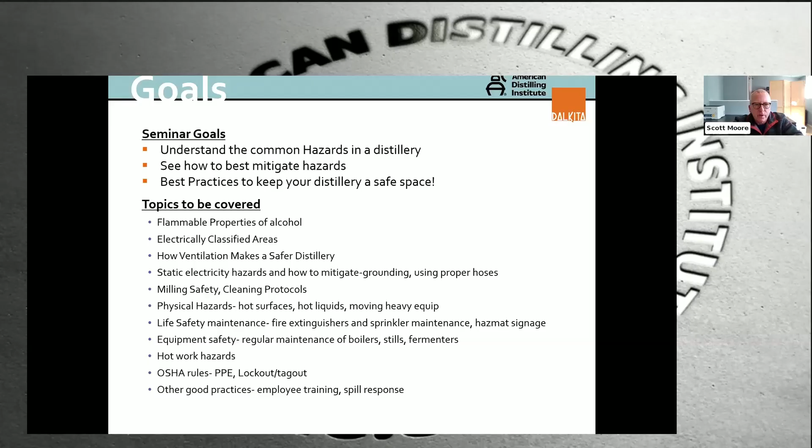To be more specific than what I just said, here are some topics that will be covered. You can read through these, and we'll go over everything as we get going.

So the first law of physics we want to look at is what exactly are the physical attributes of alcohol. Alcohol is a little bit different than other flammable liquids in that it's what's referred to as water miscible. So common sense tells us that 20% ABV is a lot less flammable, a lot less hazardous than 96% GNS.

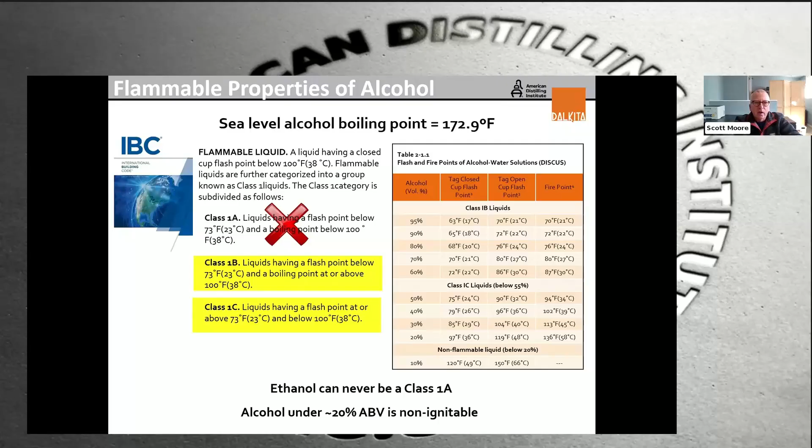And the codes don't really recognize that too well. The codes identify pretty much anything over 20% as needing to be treated the same as a flammable liquid. So we've got these three classes of flammable liquid defined in the code, and your alcohol is going to be a 1B or a 1C. It's never going to be 1A, because alcohol at sea level boils around 173 degrees, and a 1A liquid, which would be more like gasoline, boils below 100 degrees.

So let's also talk about my favorite extracurricular class here. What is really burning? The liquid doesn't burn, what burns is the vapor. If you look at this picture of the flame, it's riding about an eighth of an inch above the surface of the liquid.

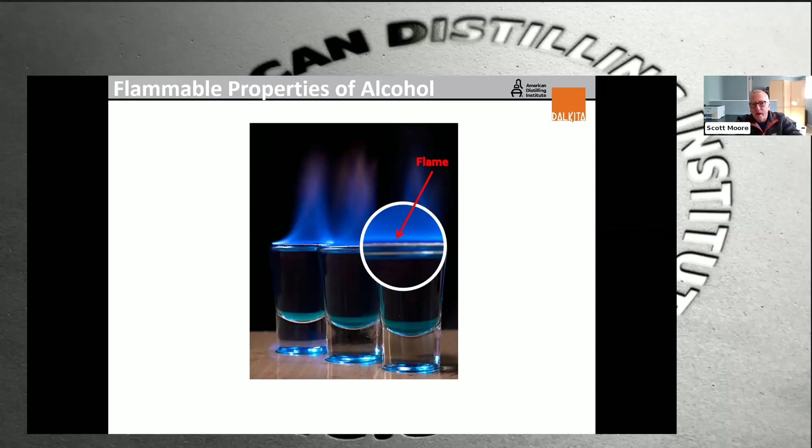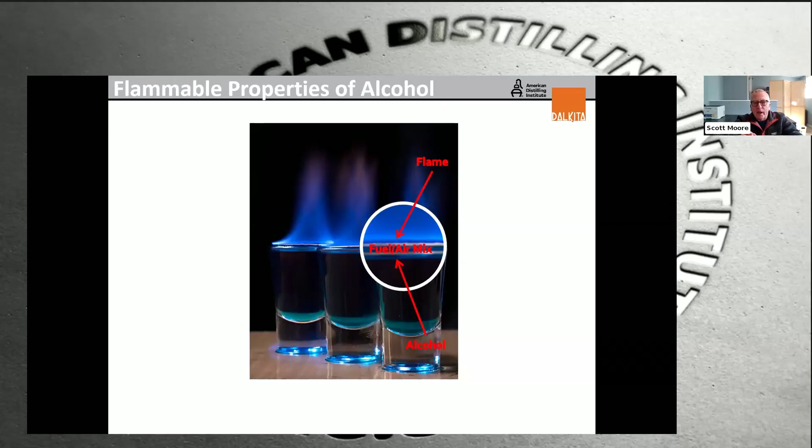What's happening is that once the flame gets started, it heats the alcohol, and the alcohol rises to the top. In that gap, we have too high of a concentration, that eighth inch gap of fuel and air, to burn. And then above that, where the flame is, is where we're within the flammable range.

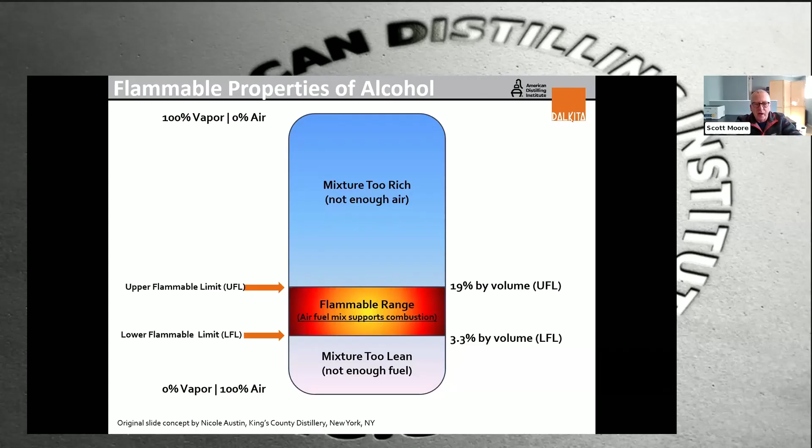So the flammable range is between 3.3% and 19% for alcohol. We don't really worry about getting over 19% because you'll know that pretty well if you're in that high of a concentration. But the codes want us to stay under 25% of that lower flammable limit.

So what could happen if you fill a space with a concentration within that flammable range is called a deflagration. A deflagration is the rapid burning of a fuel and air mixture. That's what takes place inside the cylinder of an automobile, a gasoline or diesel powered automobile. We don't have that in electric cars, obviously.

But there's a couple kinds. A deflagration can lead to explosive conditions, and the difference between a deflagration and a detonation, the technical term, is that a deflagration is subsonic, whereas a detonation occurs faster than the speed of sound. Deflagration is the burning of the fuel air mixture, whereas a detonation is a chemical reaction.

So we're not going to have a detonation. We will have a deflagration with potentially explosive concentrations.

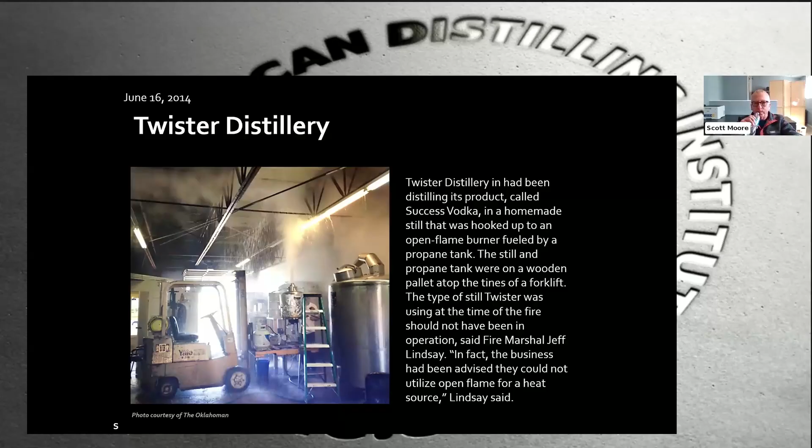And this was an employee that did suffer some burns. I think it's important to understand that while the distiller may have the common sense, perhaps someone working in the distillery doesn't. And so this is where standard operating procedures and boring safety talks come into play to prevent this sort of thing.

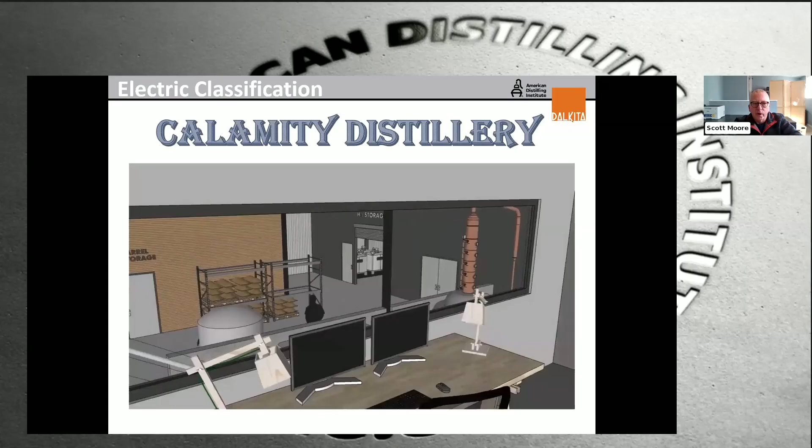So we've got your tasting room with a view to the prettier parts of the distillery. Up above on a mezzanine, we've got the small micro distillery's office where they can observe what's going on in both the production area and the distillery. They've got direct access out to the production area.

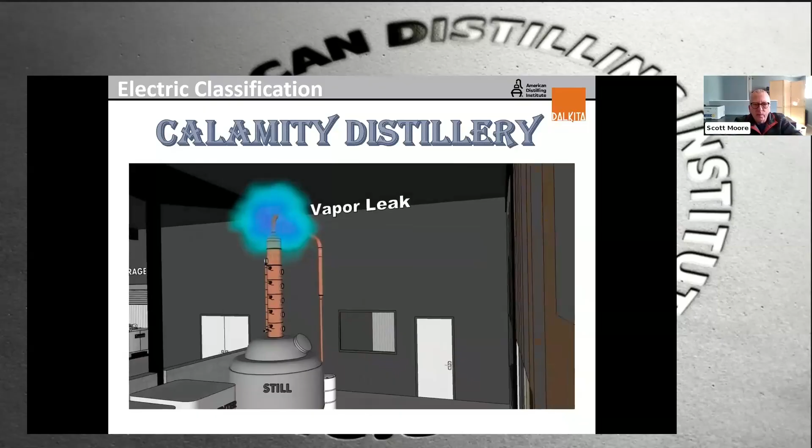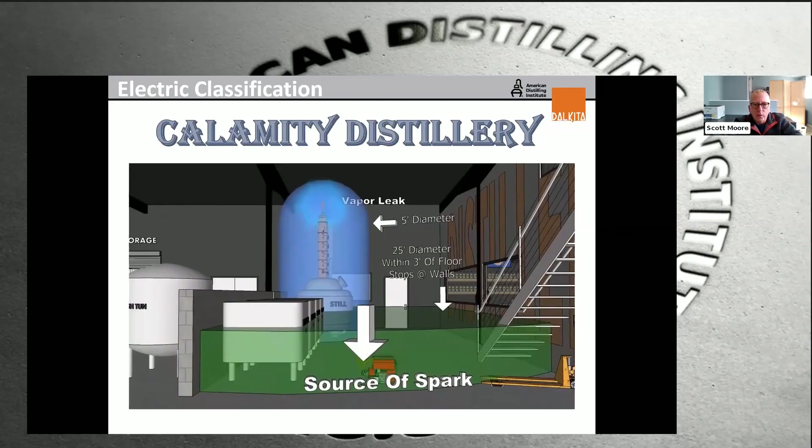And here we see some vapor leaking from the still. This is, by the way, labeled Calamity Distillery. Everything is going wrong here. But there, 25 feet away from the still, is the source of a spark. Can't quite tell what that is—looked like a generator or something.

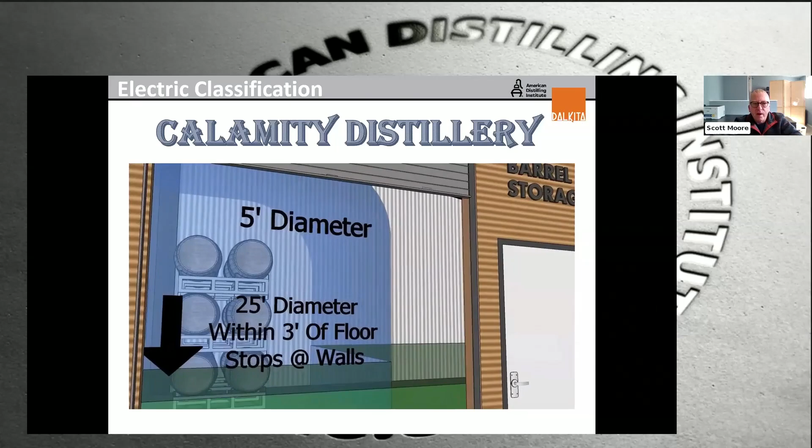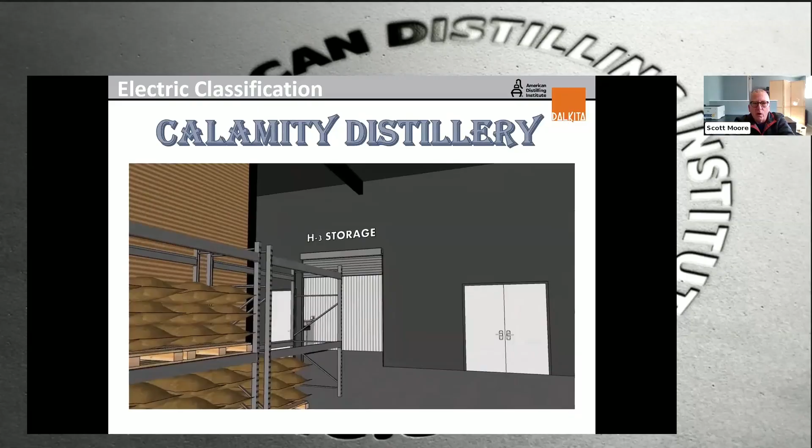Barrels do present a vapor issue, but it's very minimal. When we have done studies based on the angel share recorded data that is necessary for the TTB, it indicates that a very, very low level of ventilation is sufficient to deal with normal barrel evaporation.

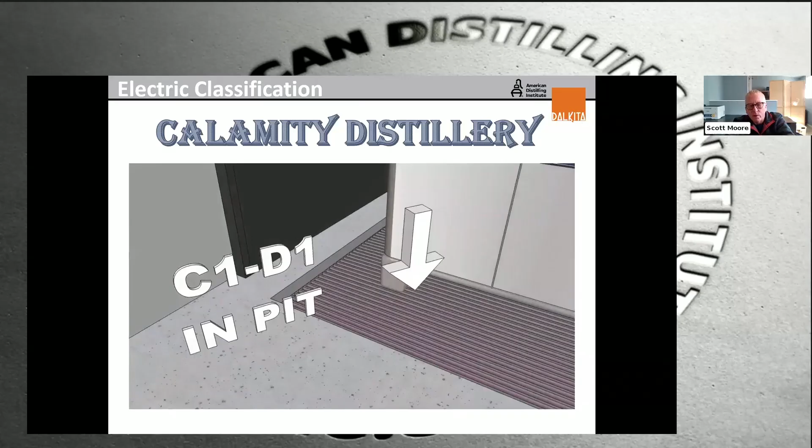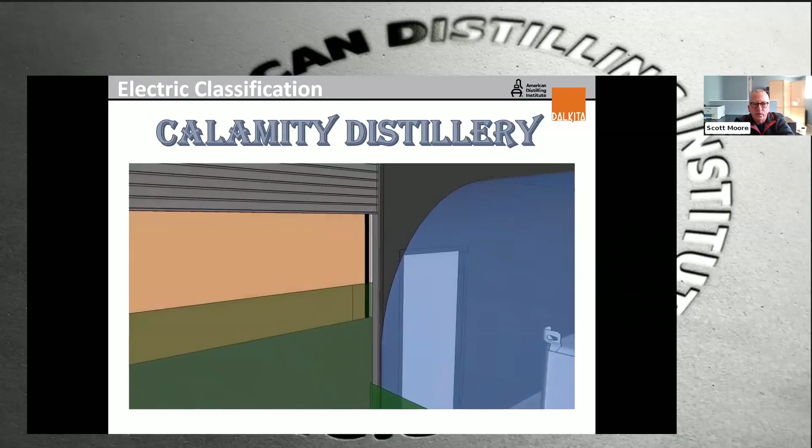When we get into a situation where we're storing totes above the maximum allowable quantities, we put them in a special room. There's a pit there, and the risk of vapor accumulation is generally due to evaporation from a spill. It's higher than the risk from barrels normally off-gassing, but lower than the risk presented by the still.

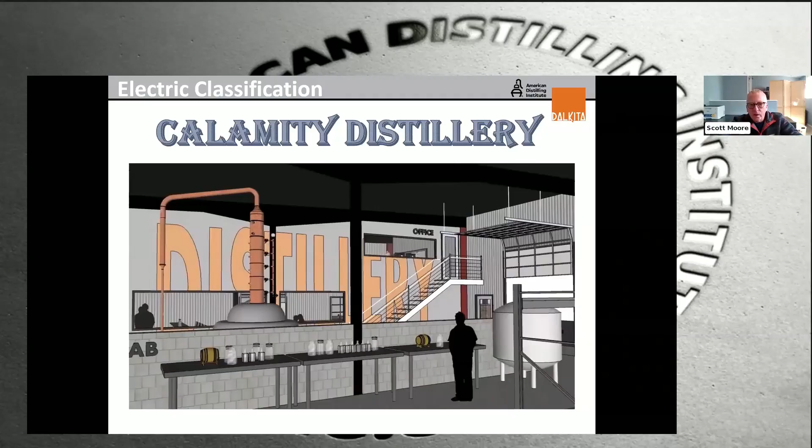The still is your biggest opportunity to have a vapor release, and really the level of ventilation needed to overcome a release from a malfunction in the still is going to be highly dependent on your operation.

So if you are reprocessing GNS by putting 50% GNS and water into the still and distilling it over a 1 hour period to create your own vodka in compliance with state and federal laws for being a distiller, that's going to produce a lot more alcohol per minute and require higher level ventilation than if you're putting 10% wash in a still and distilling it over 8 hours to produce a whiskey per se.

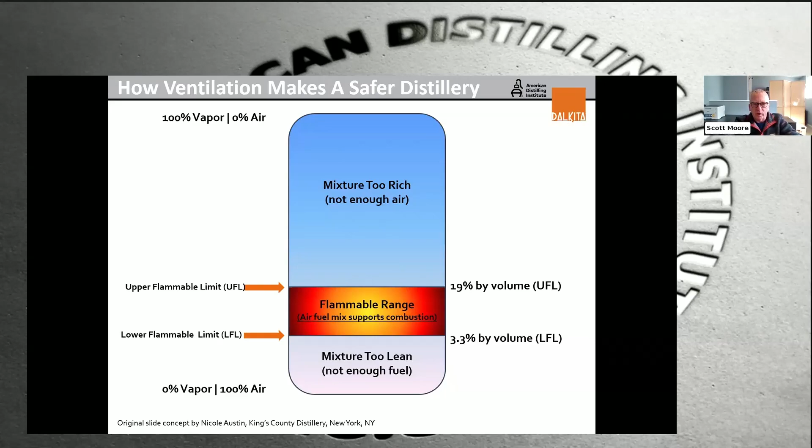So when we do provide the ventilation, the concept is that we want to sweep the alcohol vapors across the room. And so we provide, and the code dictates that the exhaust intake be within 12 inches of the floor. That's because alcohol vapor is heavier than air.

Sometimes, depending on the size of the area, where there's a dimension of 3 feet, we'll put an intake low that is a lower percentage of the intake makeup air than the intake that's high. The idea behind that is to sweep across.

Now, on a physics level, this works for alcohol, but it is counterintuitive to most building designers, engineers and contractors who might be wanting to use ventilation to circulate air to deal with heat buildup, where we all know heat rises. So you would put the exhaust high and the supply low.

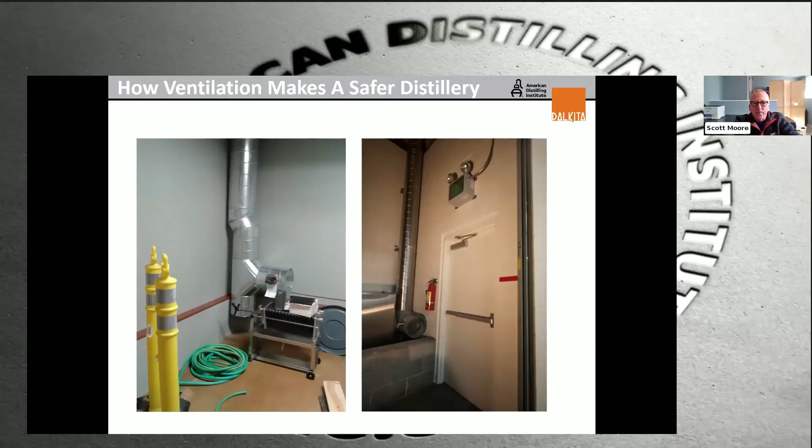That legally triggers a building code application, even if there's been no real physical changes to the building. So sometimes we see people get their first fire department inspection and a big surprise, because they thought they had complied by meeting the zoning requirements, and then they hadn't. So that's where that comes from - it's your state and local codes, and what you want to do is contact your municipality to find out exactly which codes have been adopted and how your local jurisdiction has modified them.

Did that answer your question, John? It did, and I would add to that - without disparaging local municipalities, if you're a new distillery in an area, and maybe you're the first or only distillery in that area, you can... I want to try and say this in a polite way. I think most people can expect a little static from your local authority, because through no fault of their own, they will have had no experience applying whatever their local demands are to a business. Any fire marshal in Kentucky is probably going to know it like the back of their hand. But if you're the first distillery in a small area and they're not familiar with all of that, there's two sides of that coin.

You may know the regs better than the person inspecting you sometimes, and you may have to put up a little bit of a fight or negotiate with them to get it right, depending on their interpretation of it and how they apply whatever the code is to an industry with which they may not be as intimately familiar as if you were putting in a machine shop or just a standard civilian office of some type.

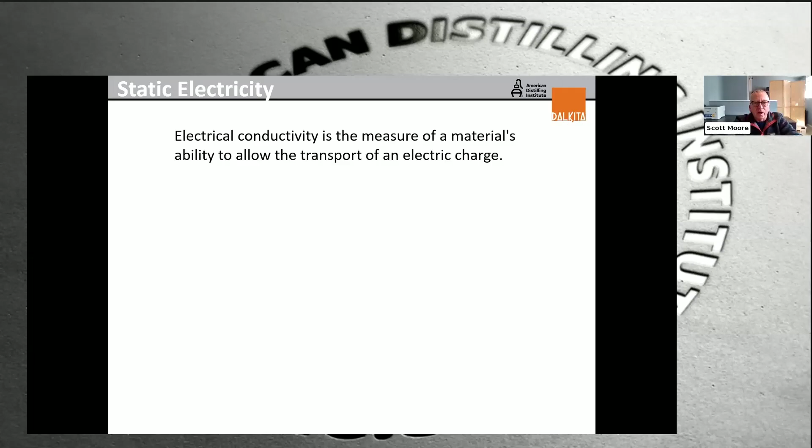All right, now electrical conductivity, let's see. This is about static electricity. So in the fire triangle, what we're talking about here is your heat source. And when we're talking about ventilation, we're talking about your fuel source. So the ventilation removes the alcohol vapor faster than it can build up. Heat source or not, there's not going to be an opportunity to complete that fire triangle.

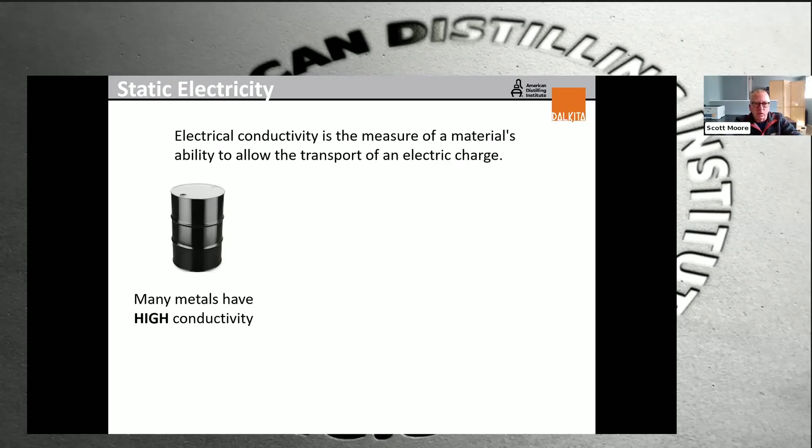The code requires also that we mitigate the heat source in several different ways, and one way is to eliminate static electricity. As a liquid or a grain solid moves through a pipe, it can develop static electricity. And if that pipe is not metal, it's not going to be able to conduct that static electricity.

So you can actually get a static charge coming off of a garden hose, for instance. Well, the right kind of hose has a wire in it that can then be, with the tri-clamp fitting, connected to metal apparatus. The idea is that we want to bond all those things together and then ground it. Alcohol falling through the air can also build up static electricity. Now, at the scale that we see here, where it's pouring a shot glass, you're not going to have a problem.

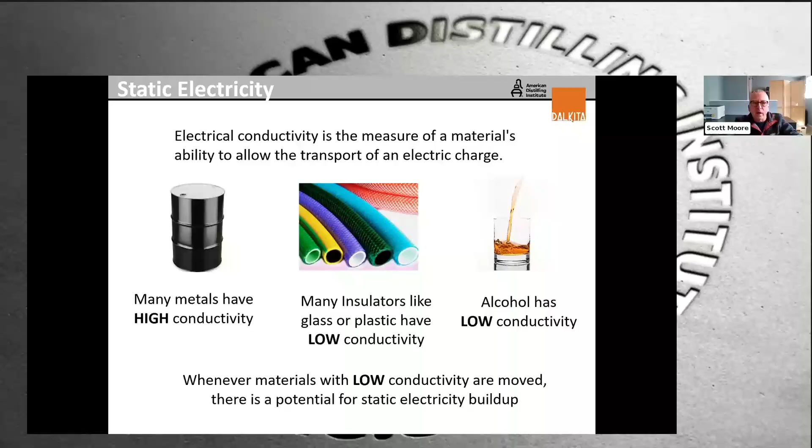But if you're filling a 10,000 gallon tank with GNS and you're dumping it in from the top, you really could create a static buildup in that liquid stream. So that's why we fill from the bottom. Here's an image of a pipe with liquid going through it to make the point that the pipe could develop a static charge.

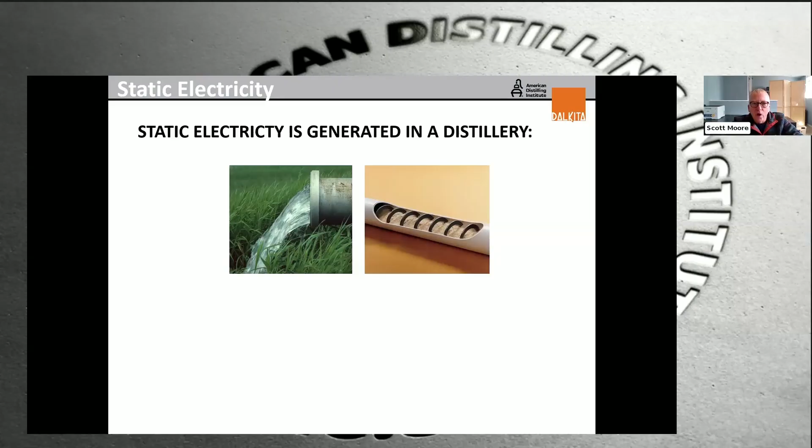When we're looking at this screw auger for perhaps grain, we're looking at the same thing there. And then we've got totes, the plastic totes, which are a whole other story, that aren't allowed in the distillery on a permanent basis. And your metal totes, which are different. So these containers need to be also grounded.

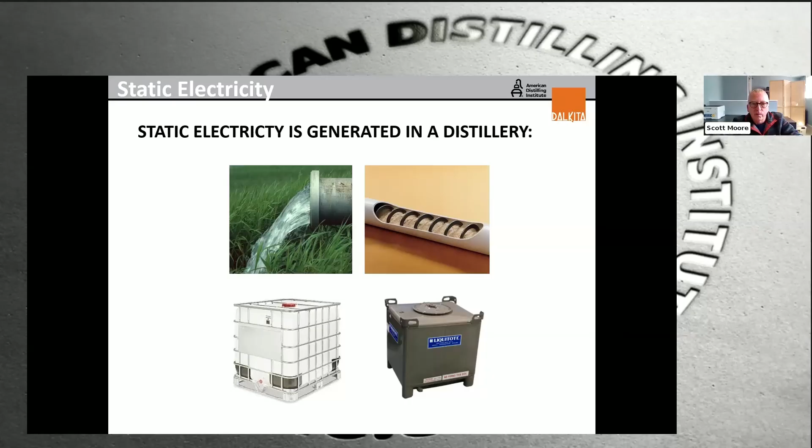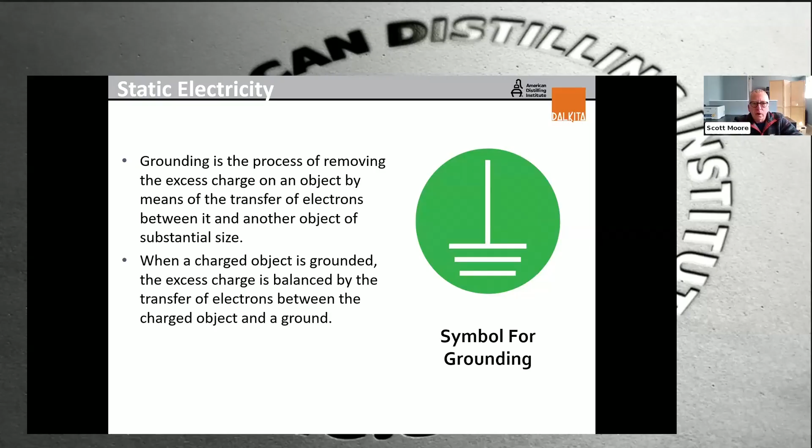This is a symbol for grounding. And when we do ground, what we need to do is grounding and bonding. So we want to first of all bond all the distillery equipment that has over 20% alcohol together. And that can be done through the piping, fittings, supports for wiring and so forth.

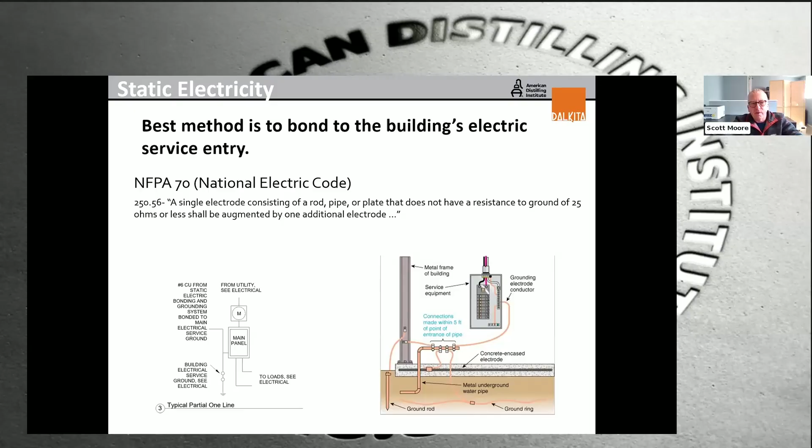And where there is a separate situation, where it's not possible to get a continuous electric bond between equipment, then we can add grounding wires. And the best way to do this is to ground it to the main electric service. That way you've got an electric potential for your bonding and grounding of your equipment that is the same as the electric potential for the building.

So that building electric service is going to be grounded in 3 of these 4 ways, generally attached to building steel, connected to a water pipe before the meter or before the shutoff. There's a UFER rod, which is a piece of rebar that's cast into the concrete foundation, which is required in newer buildings. And then we've got what most people are probably familiar with, the copper grounding rod pounded into the ground.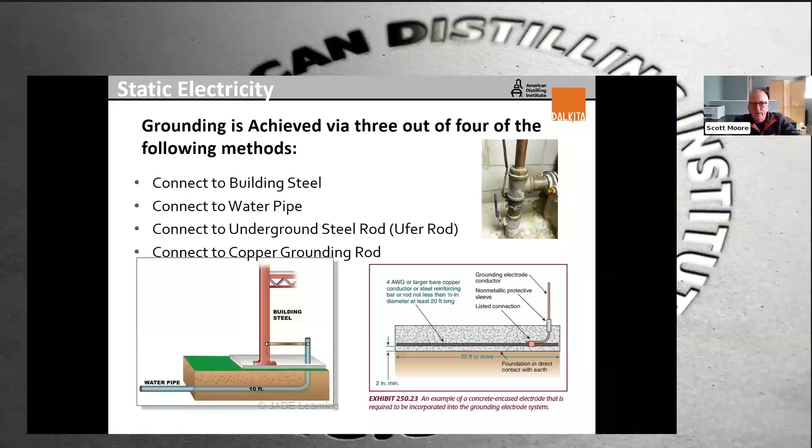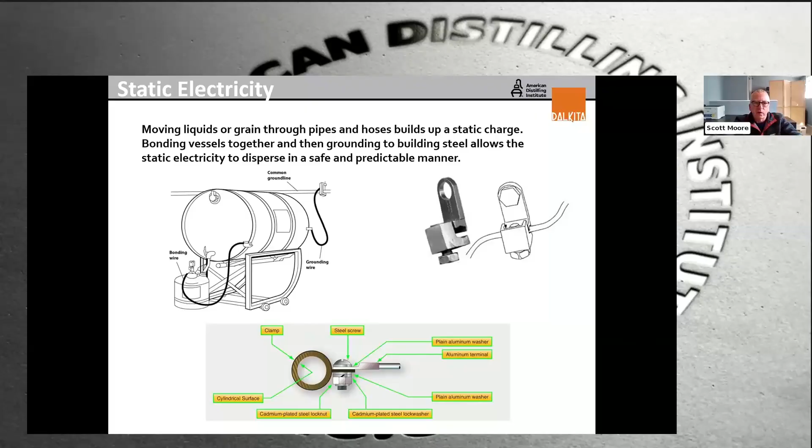And the way to be sure that you have achieved the proper bonding and grounding is to have an electrician test the system for resistance as per the National Electric Code. When we've got portable pieces of equipment, we want to be able to have alligator clips and jumper cables to bond them together. And these are some different fittings.

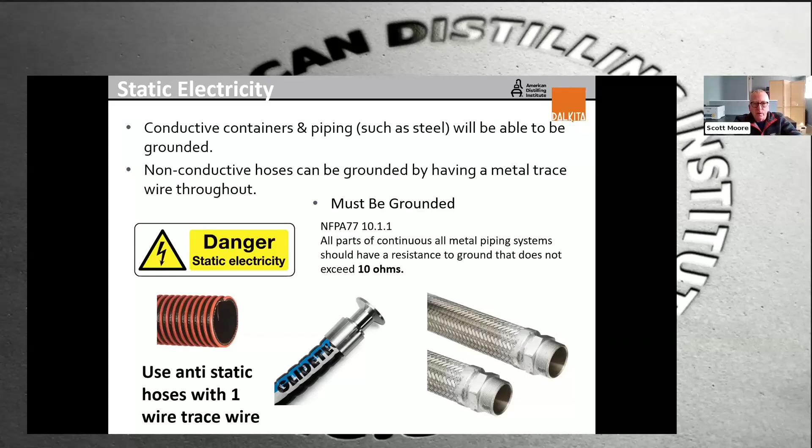And that's a big thing that's lacking in the code, is an understanding of scale. That's something that is important to educate your AHJ about - that hey, we are not Jim Beam. Well, hopefully one day, but this is a smaller operation and the safety requirements really are different.

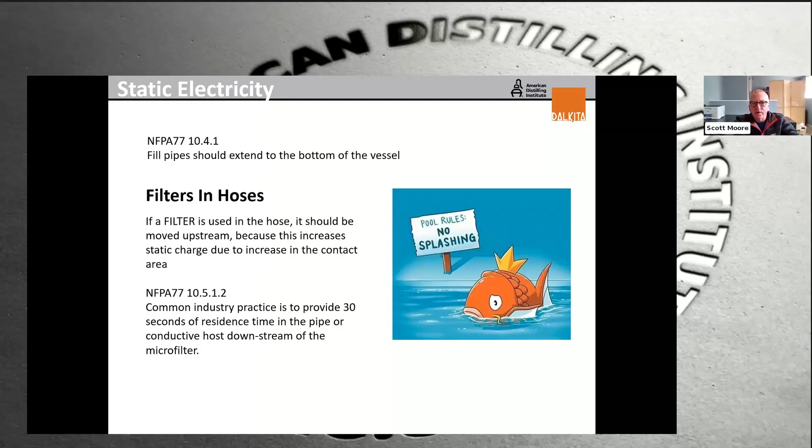And that's okay as long as we don't have any electrics inside of this. I know Bill Owens likes to tell a story about a guy who stuck a hand-held drill into the top of a tank, and the sparks from the drill motor caused an explosion. That's a common sense thing.

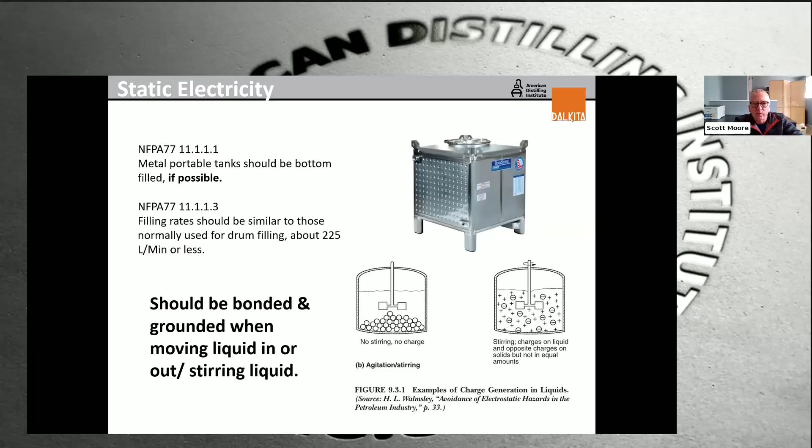If you're using a piece of equipment like that, I think it'd be fun if everyone has a drill and they turn out the lights at night and run that - you can see a pretty neat light show inside there. But this is okay, you just need to be cognizant about what's going on, and this is why this vessel needs to be bonded and grounded.

I said earlier that plastic totes aren't allowed with the higher proof spirits. They're approved for transportation, and that's what all your GNS comes in, this volume size. What needs to be done is that it needs to be transferred for permanent storage or long-term storage into stainless steel. Plastic drums are okay, provided you have sprinklers, water - and that's because the code recognizes the difference between water miscible alcohol and something like gasoline.

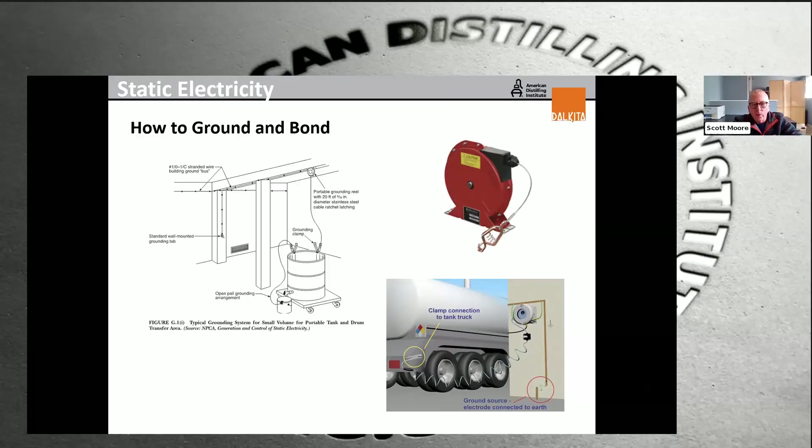So a common thing that we put into our distilleries is this cord reel, that would be attached to the bonding system. You can clip this to a portable tank. We usually have these where we have alcohol loading and unloading into tanker trucks.

So now we're going on to dust, and you may or may not have heard the term combustible dust. We're not talking about what builds up on your living room table when you've been gone on vacation for a month. We're talking about grain dust, and grain dust is of the size and type that it is combustible, and we know that.

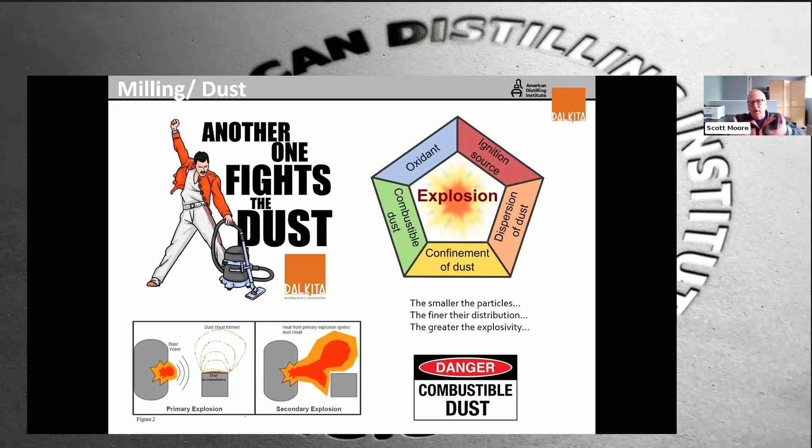And what the dispersion is getting at is that you may have a small explosion, as shown on the lower left image, and that could then loft the dust into the air, creating a secondary explosion.

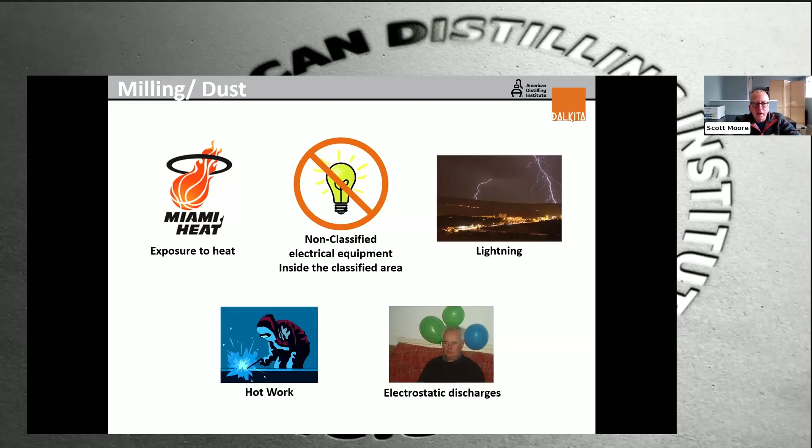These are some of the items that can contribute to that heat source of your fire triangle: any kind of heat, like an overheated bearing, non-classified or non-explosion-proof electrical, lightning, static electricity, and hot work, which is welding, grinding.

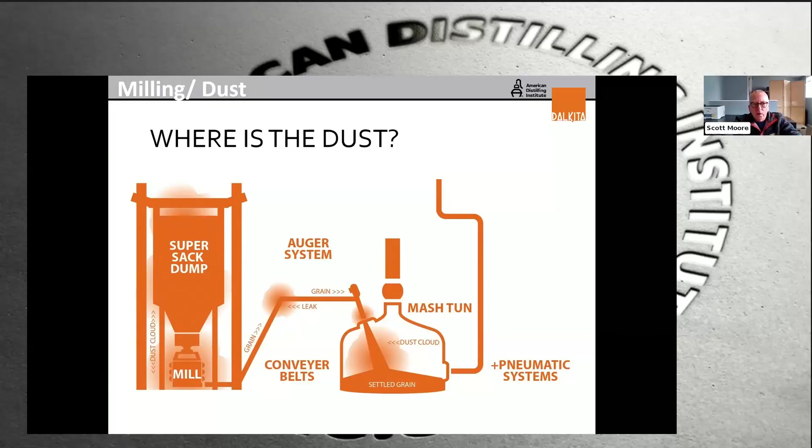So this is an image of where you might have your dust, and we've got some concerns at fittings. We've got some concerns where there's an open part of a component, and the mill, obviously.

Another thing—we talked about the sombrero of death. Well, with dust, it's more the electric toque of death, for those Canadians in the audience. The shape is more of a dome.

When we have an overlap between the alcohol classified area and the dust classified area, it creates what is termed a hybrid mixture. So if you can imagine, you've got dust particles that are coated with alcohol vapor—that can become a lot more flammable than either of those two things on their own.

Whereas with dust or alcohol vapor, the regulation wants us to stay under 25% of the lower flammable limit, if you do have a potential for a hybrid mixture, you have to stay under 10% of the lower flammable limit, or the minimum explosible concentration, which is the companion term for dust. What this would do is increase the amount of ventilation exhaust that would have to be placed inside this area to deal with these things.

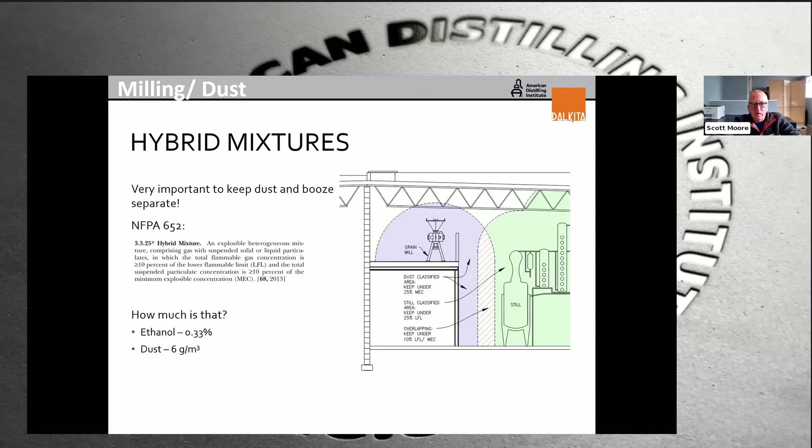Now, dust in a micro distillery or even a microbrewery situation is almost never an issue, but it does come up, especially as people in the AHJ start to think about things. It's better to let them know that there's an issue, or that there could be an issue, and how it is resolved, than to sweep the problem under the rug, so to speak, and find out later that they find out on their own and bring it up.

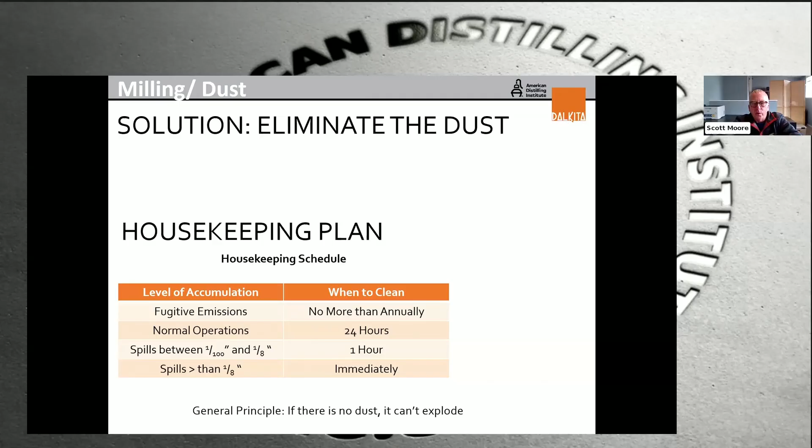So the simple thing with dust is good housekeeping, and the code will require a dust hazard analysis, which basically sets forward a housekeeping program. You follow the program for a month, record how much dust you've accumulated. If the program is working, you won't accumulate enough to even test, and you will be deemed to have eliminated your dust hazard. So again, it's really kind of common sense.

You want to clean up that mill room, and anywhere around it. Room design is an important factor—it makes it harder to clean if you've got a lot of little nooks and crannies. So we usually like to keep mills in a separate room with smooth walls that are not painted tan. Either a lighter color, or preferably a darker color, so you can see what you're cleaning.

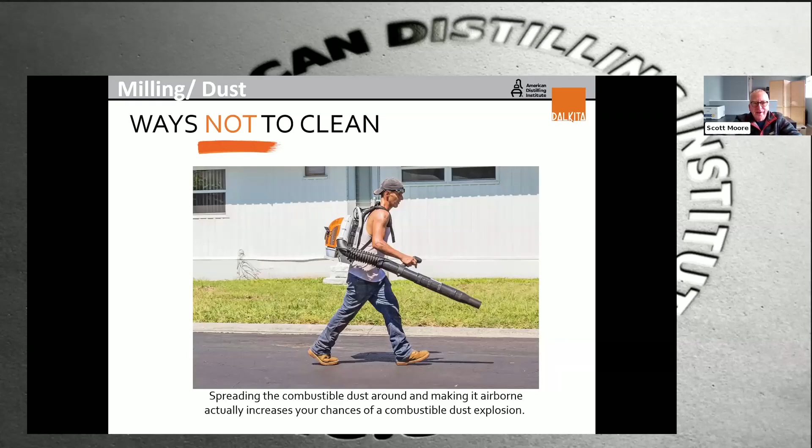This is not the proper way to clean. All you're doing there is lofting the dust into the air. Proper ways to clean are with a static-free broom, a mop, wet rags. Oily rags laying in a corner are another problem in and of themselves, but really just damp rags

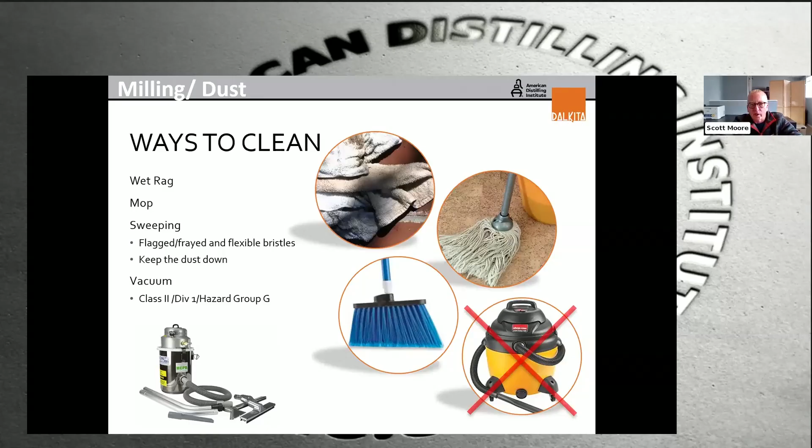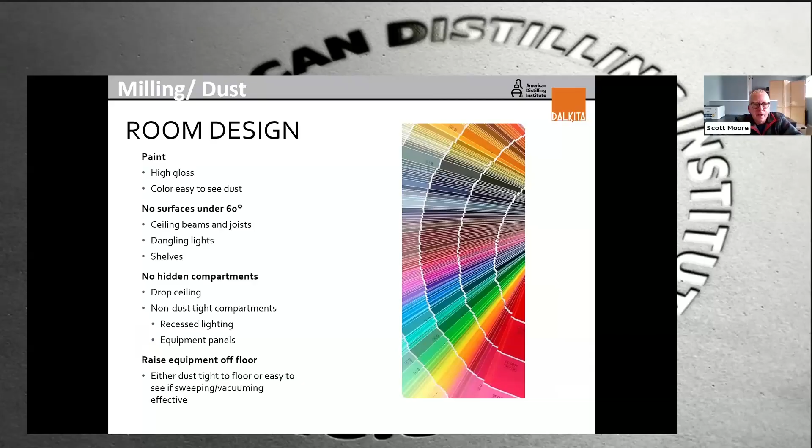And this is talking about the room design. I'm an architect, right? So paint color is pretty, right? It's an important aspect of my artsy side, but it does have a practical application here. You want to have a higher gloss, so it's easier to wipe up with a damp rag, and you want to use a contrasting color to what the color of the grain is going to be.

So we're talking about physical hazards, and we're getting into a few other things that we want to consider, as far as safety goes in a distillery.

Yeah, I'll let you read that later.

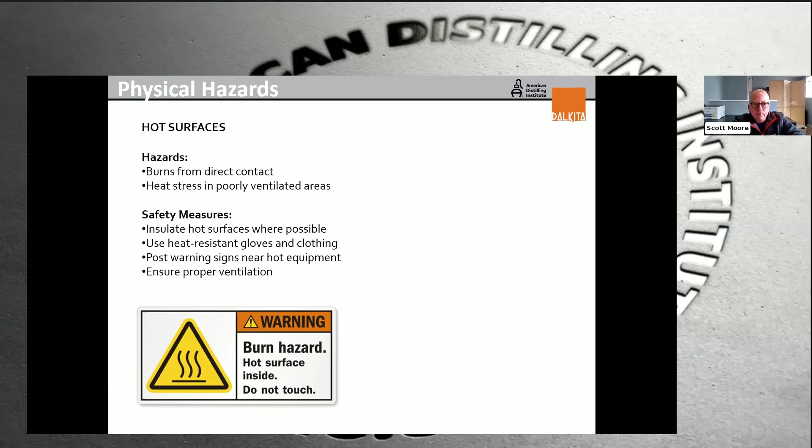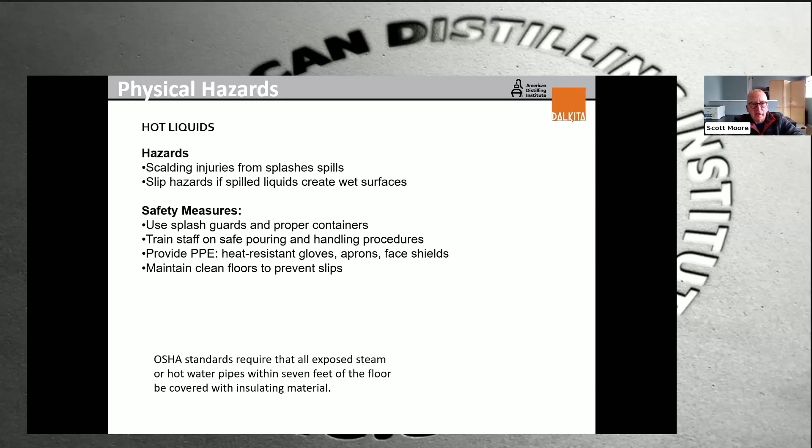And then we've got hazards for hot liquids, which include scalding. This is where mash cooking can come in. And again, it's common sense—you don't want to get splashed with some hot mash. Even though mash under 20% alcohol is not really regulated, there are some risks that need to be taken care of. And now we're looking at some common sense things.

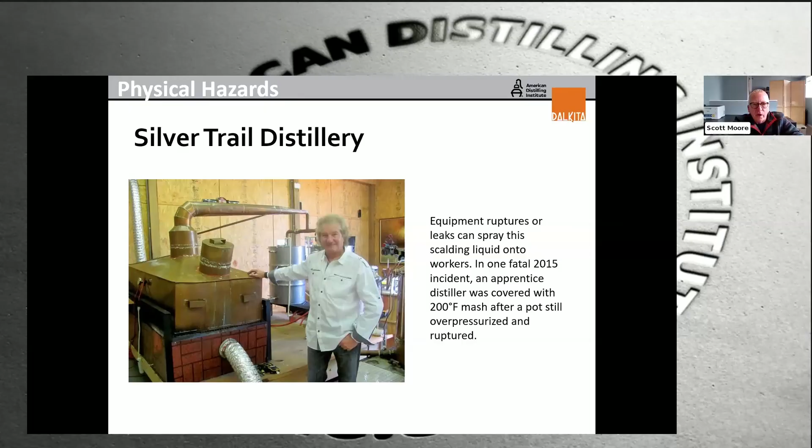We've got a dryer vent there. This is a direct-fired still. This is not real brick—this is that fake brick that's like an asphalt shingle. Just a lot of things going on there that really shouldn't be going on. And this was the before and the after.

So, fork trucks. There's some obvious hazards having to do with fork trucks, but the one we get asked about mostly is, do I need to pay double or triple for a static-proof fork truck? And also, can I put my propane fork truck inside my warehouse? Well, no, not really.

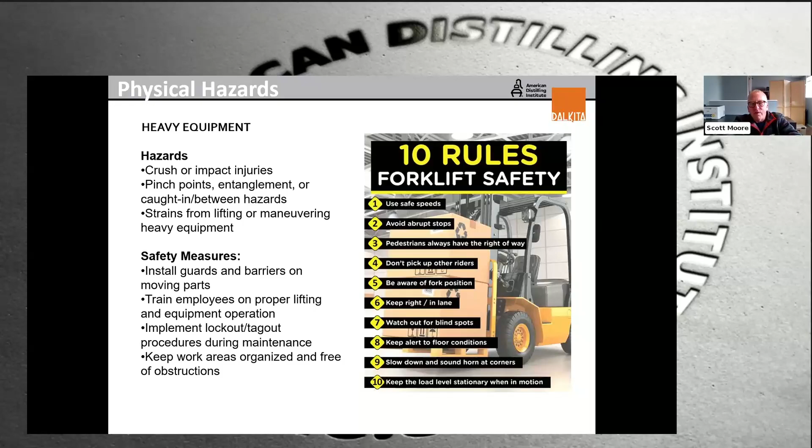You should no more do that than you should sit in your car listening to your favorite tunes with the garage door closed and the motor running. It's not as bad in a warehouse because it's a big space, and as common sense would tell you, with things like CO2 and alcohol vapor, a lot of it has to do with scale and the amount of air surrounding it. The answer to do I need an electric forklift that is explosion proof—the answer is no, if you can provide documentation that you have eliminated that classified area by providing more exhaust than alcohol vapor could drive.

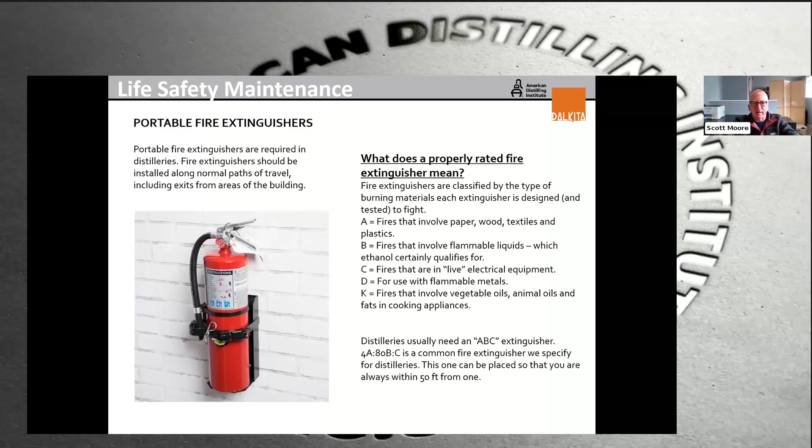Portable fire extinguishers are required by code. It's an annual inspection generally to make sure that they've been tested properly. Usually a private company will do this for you, and then a fire department inspector might come by and just annually check that you've been doing this.

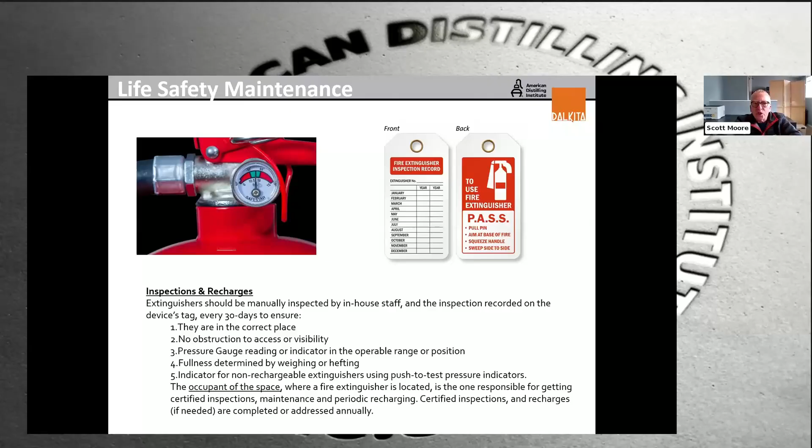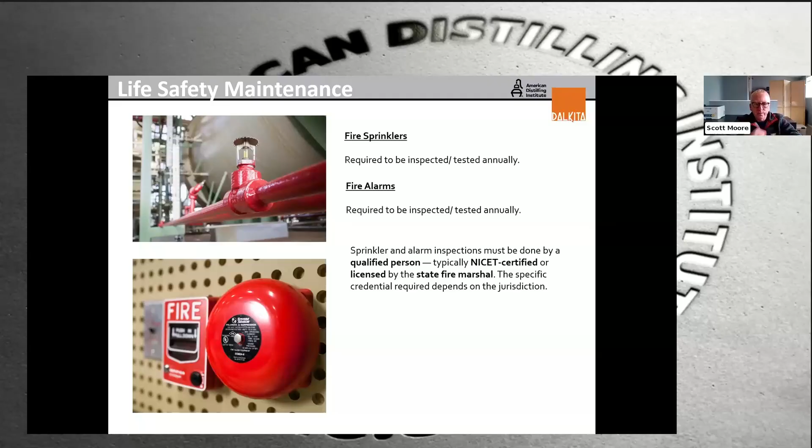The same is true with your fire alarm and sprinkler system. Generally, the company that installs sprinklers and fire alarm systems will do a comprehensive annual testing of this. Often they'll also test any fire shutters, doors that close to form a fire barrier based on a heat-activated fusible link. Those need to be tested once a year as well.

Signage is an important part. It's not only required by code, but it alerts people to the fact that, hey, in case you didn't have the common sense not to smoke next to the barrel house, this will help remind them.

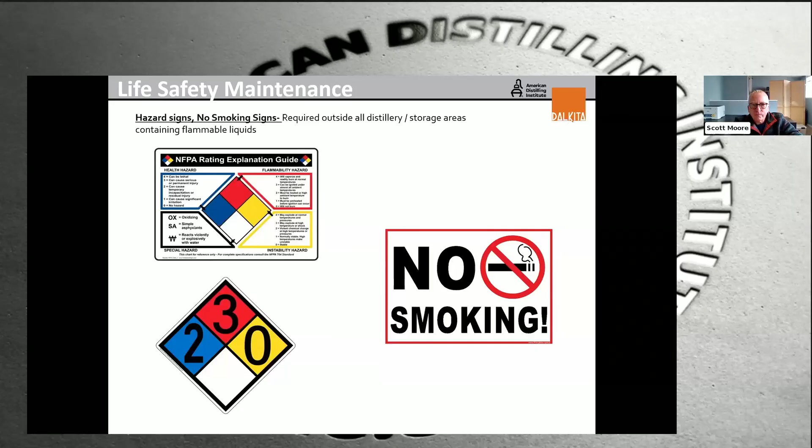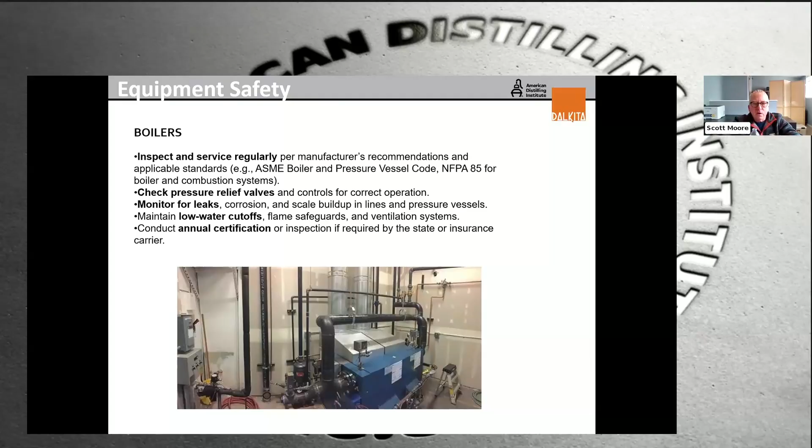Low pressure boilers are those that operate at 15 psi or less, and depending on your jurisdiction, you may have an annual inspection of those. High pressure boilers operate at more than 15 psi, and we see those in larger facilities more often than in smaller ones. Some jurisdictions will require a licensed operator that has to take classes to operate a high pressure boiler. So if you're deciding which type to use, that may be a consideration to find out if there are additional regulations. But regardless of inspections or legal requirements, they should be maintained and inspected by your operation per the manufacturer's recommendations.

Stills are interesting. Sometimes we get AHJs, government officials, that will say, hey, I want your still to be UL listed. Well, no one makes a UL listed still. But what they do make is UL listed components—a UL listed motor, UL listed sensors. So that's where the education comes in, explaining that this still is an assemblage of listed and tested pieces of equipment.

Oftentimes this is colloquially referred to—the pot as the boiler. Well, we don't want to call it that. And we also don't want to call your hot liquor tank a hot liquor tank. We want to call it a hot water tank, just because the term boiler connotates to people who aren't familiar with distilling an actual water or steam boiler.

One of the most important things, other than getting properly designed and reputable equipment, is being able to demonstrate that equipment is operating at very low PSI—really no more than 3 PSI, and all distillers kind of know this. The picture I showed you of the Kentucky Silver Trail still that exploded was a result of the manufacturer running out of 3 PSI pressure relief valves, going to the hardware store and buying a 100 PSI pressure relief valve meant for a residential water heater. So you want to make sure you've got the proper pressure relief valves in the proper area per the manufacturer of the equipment, and a pressure gauge that you can explain to your AHJ—hey, this doesn't work over about 3 PSI, and it'll never be over that. Besides, we've got electric interlocks that will shut it down if something goes wrong.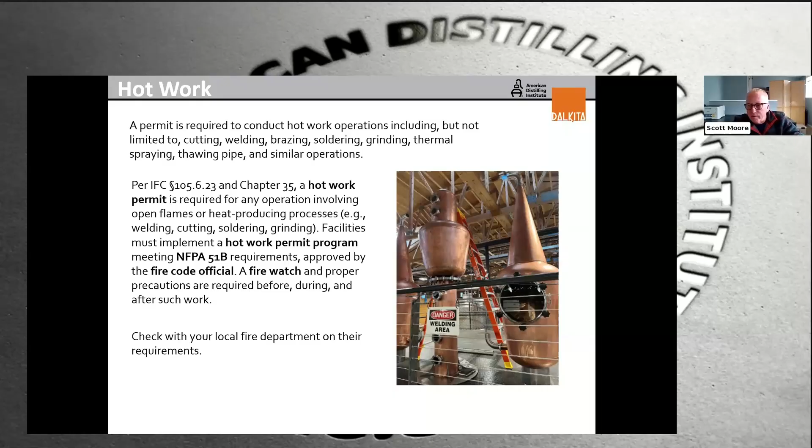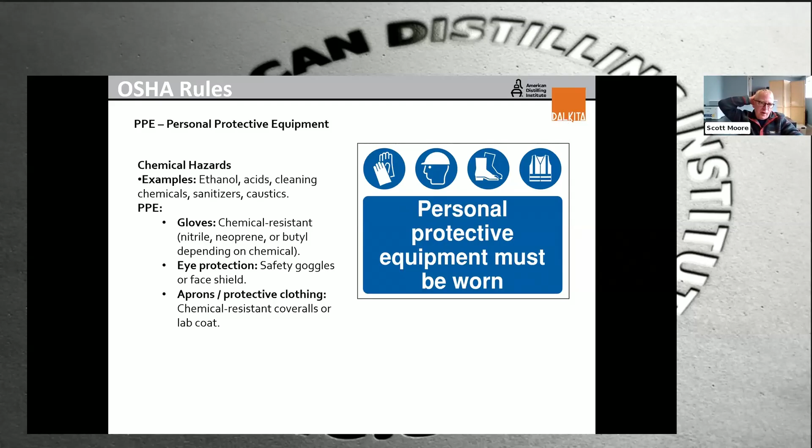A little bit about PPE. This is kind of in the realm of OSHA, and it's important to take the time to put on your gloves and wear eye protection, aprons, in some cases steel-toed shoes, but in most cases at least you're not going to want to be in there in your shorts and sandals. Usually people find out not to do that anyway the hard way when they drop a pipe wrench on their toe.

But these are things that you should be aware of and your employees should be aware of. If there is a respiratory hazard, say maybe when you're cleaning a dusty mill room, it might be nice not to have repeated exposure to that. And so you would want to be able to use the proper equipment.

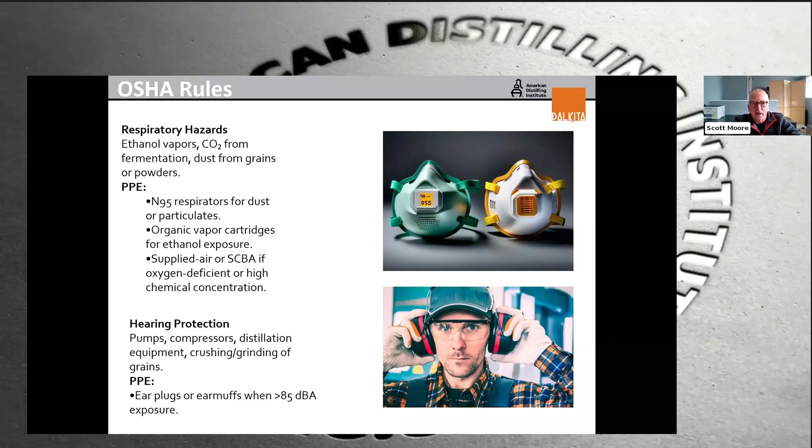Hearing protection, it may be all right to walk around in a loud factory every now and then, but if you're there day in and day out, it could lead to something like tinnitus or some other hearing damage. Lockout tagout is something that most people might be familiar with.

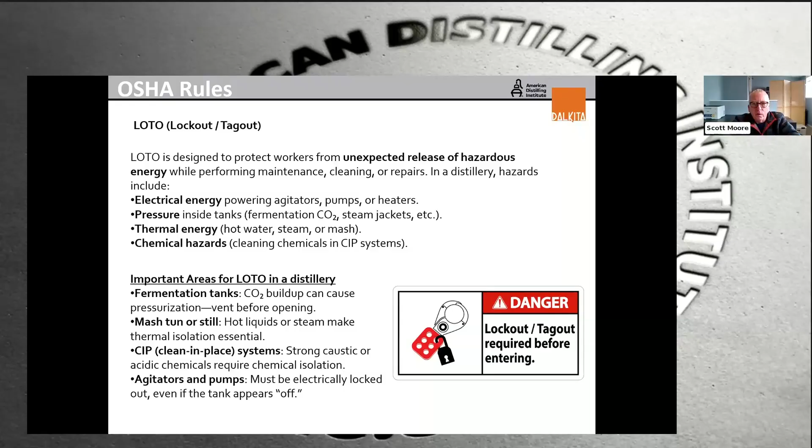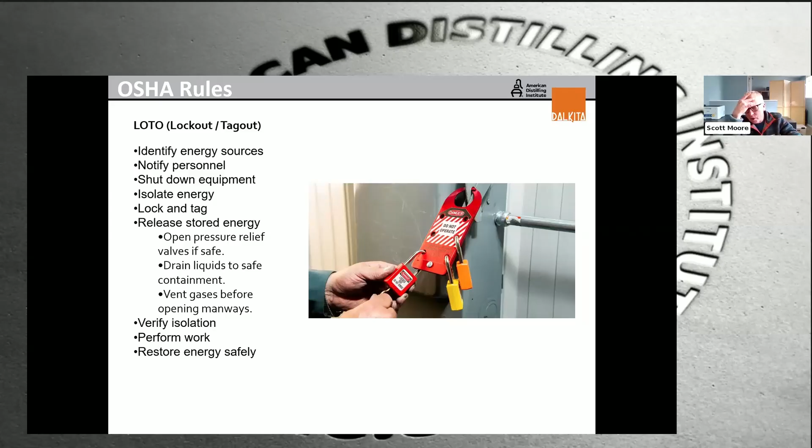The same might be true for confined spaces. You might put something in place that makes sure that you can't accidentally shut the man door on a tank while someone's inside cleaning it. Of course, they've got to wear the right kind of respiratory equipment and have a way to test what the air is inside those confined spaces.

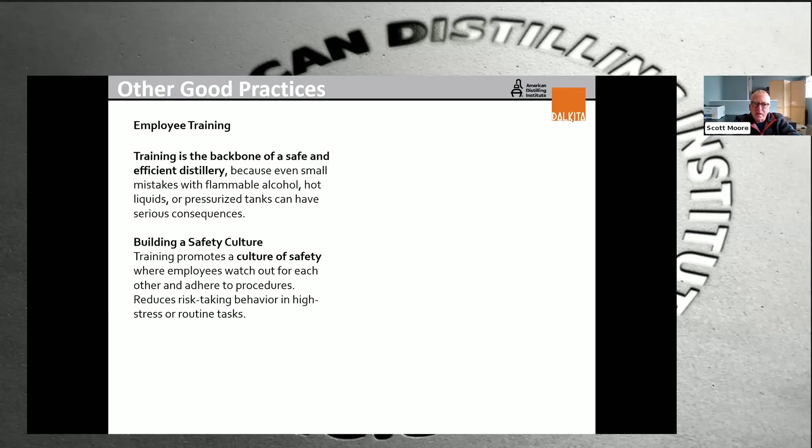So employee training is the backbone of a safe and efficient distillery operation and building a safety culture. This doesn't mean that you have to be gung ho and crazy. I think there's ways to make it understood that, hey, let's just do this. It's going to make our life a little bit better and potentially extend it.

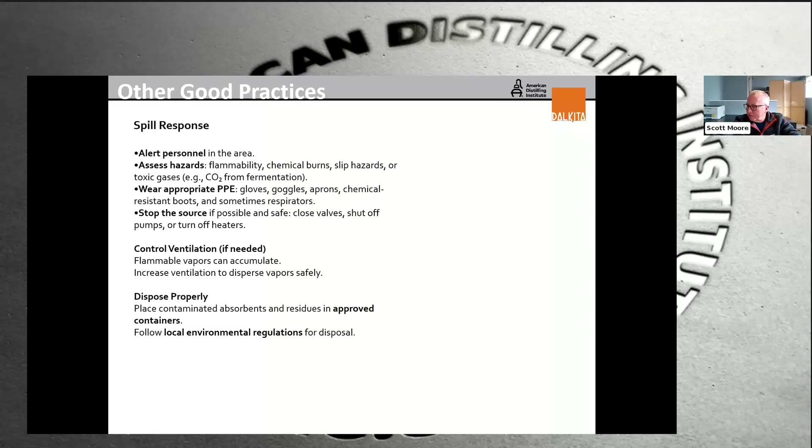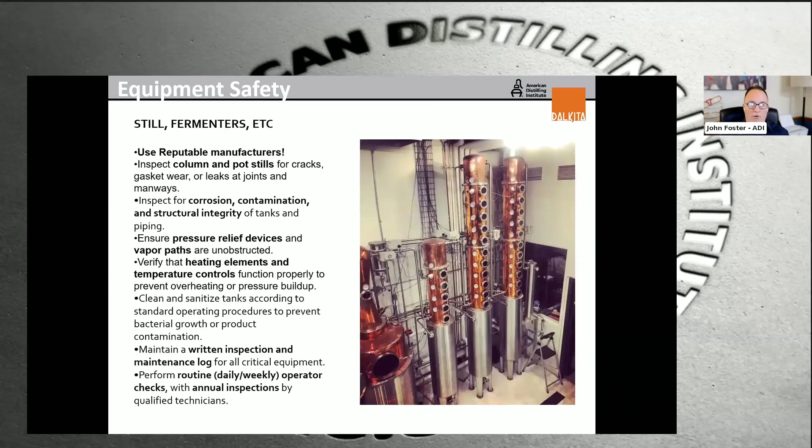Yeah, one of the questions that came in from Rusty really is about condensate return pumps and your experience with running into whether they are included or cause a problem with having to be explosion proof as part of the overall attention to safety when it comes to explosion risks.

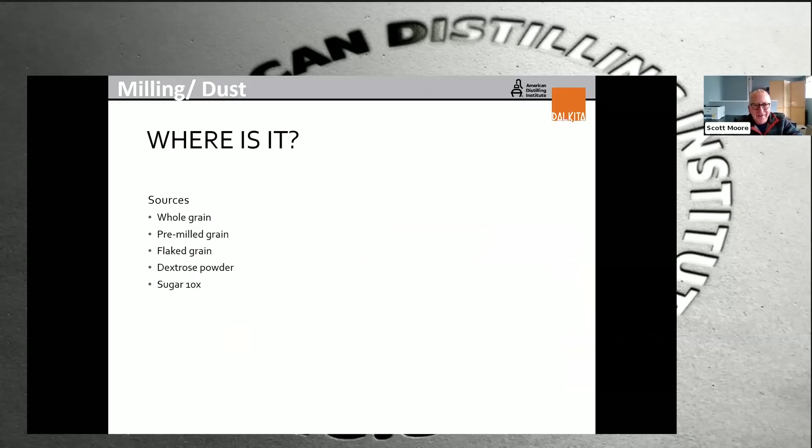Yeah, that's a really good question. And gosh, it's almost like I could have planted that question for you, Rusty, but I swear I didn't. Well, you can thank Rusty for that.

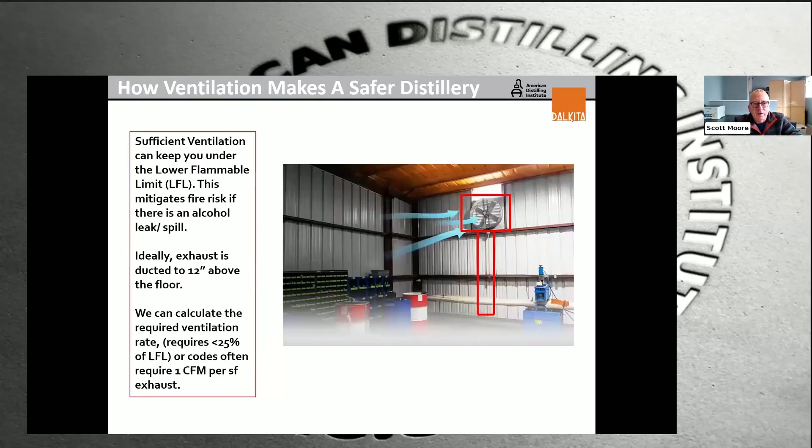Yeah, because the condensate pump, I'm trying to get back to that sombrero picture. The condensate pump is usually one of those things, best practices, we want to keep our electrics out of that sombrero, right? But there's always going to be something that it's just not practical to keep out of that area, and the condensate pump is one of those things.

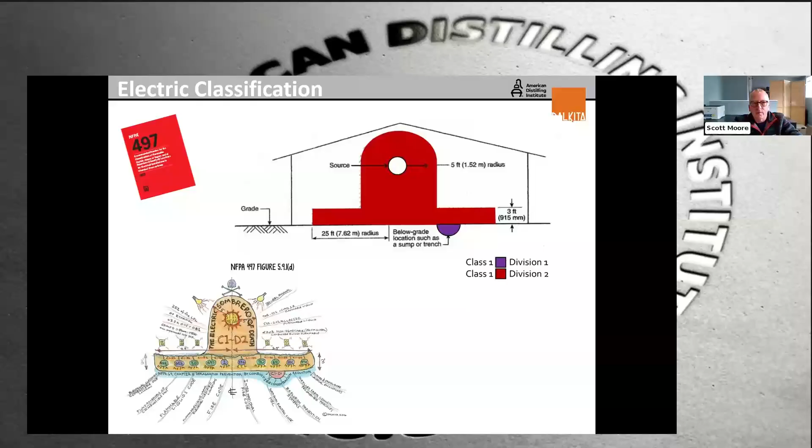You can get an air activated condensate pump, and if this is your still, it wants to be right down here. But if you do put this ventilation system in, and that ventilation system is designed to match the operation of your equipment, then you eliminate this altogether, and that condensate pump no longer is an issue.

So what we usually advise people to do is, okay, we're not going to move your condensate pump and make your boiler system not work right. We're not going to recommend that you pay more, although I've heard in some cases it's not that much more for an air activated or an explosion proof condensate pump.

But what we are going to recommend is that you put this ventilation in, and in my opinion, if you eliminate the possibility of that fuel by having this exhaust there, that is a lot safer than designing electrical equipment that can withstand that explosion. I'd rather just not have the explosion or the deflagration than to rely on equipment to prevent it from doing damage.

So if I understand you right, from a code or inspection standpoint, if somebody said, 'Hey, you got to have this,' then you would advise the distillery to prove that the ventilation was sufficient to avoid it being a hazard in the first place, instead of immediately going to replacing the pump. Is that right?

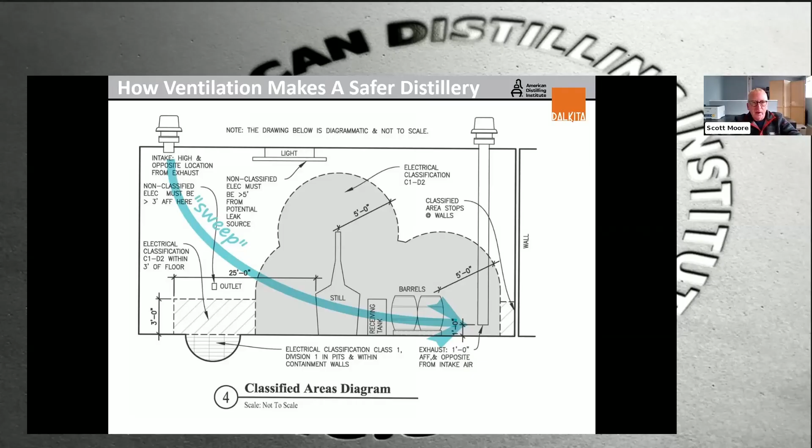So when a code like the building code or the International Fire Code says you need to follow this standard, you then have to mesh in the rules from that standard. I think the slide we have does articulate exactly where the regulation is found in the code dealing with plastic containers.

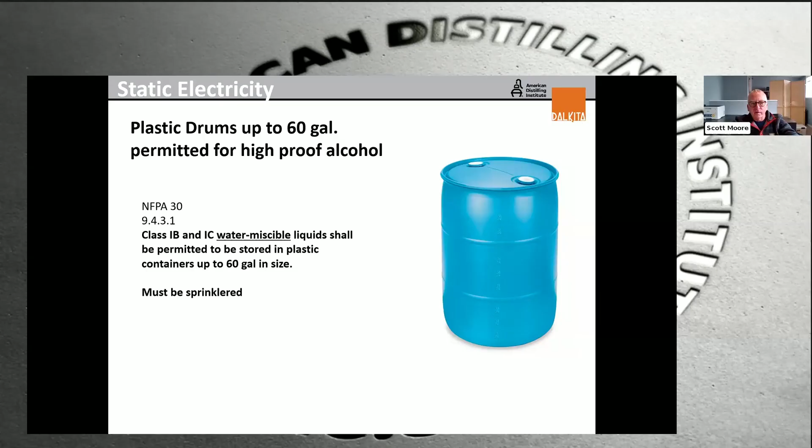There is some logic behind this. If you have a plastic container, it will melt and release the flammable liquid. So the people who wrote the code, or NFPA 30, have drawn the line. They're okay with drums, not if it's gasoline, but if it's water-miscible liquids like alcohol—though you might need to demonstrate a special exception in the code for that—it doesn't allow for the plastic tote.

And you see them everywhere. This is a question I get all the time because so many distilleries have them. It's shipped in that—how can it be shipped in that? You can't really get it shipped that way. Well, you can, but it's going to cost a lot more to force one of these distributors to ship it in a stainless steel tote.

So what we recommend is different operating procedures, where our standard operating procedure meets the code by allowing us to bring this thing in for 24 hours, during which time we empty it into a stainless steel tank that we own, and then it goes back outside. There are other regulations about outdoor storage that would affect these plastic totes, but it may make sense for an operation to store full ones outside. It really just depends on the situation and your size.

I hate having to tell people that plastic totes aren't allowed because everyone has them. There may be an opportunity within the code—most of the code is prescriptive-based, and we like to use that prescriptive language because it's easy to point at it and say, right here, it says this. But you can also take a performance-based approach, where the code wants us to achieve an outcome, and it's up to the facility and designers to figure out how best to achieve that outcome.